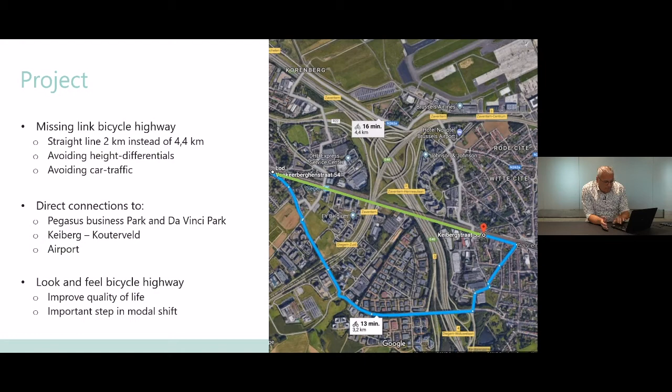What's the progress? The contractor Besix started last August, building the pylons, the piles on the R0 that will support the bridge over the R0. That's already built. The total project zone was the green line I mentioned, and the building period will run up to August next year. That's what we're trying to achieve.

What's happening right now: utility companies are doing their works in the Kleetlaan and the Mommaertslaan, and at the same time our main constructor is building the piles, as I mentioned, and the bridge and all the other stuff up to August next year. That's the plan for this project.

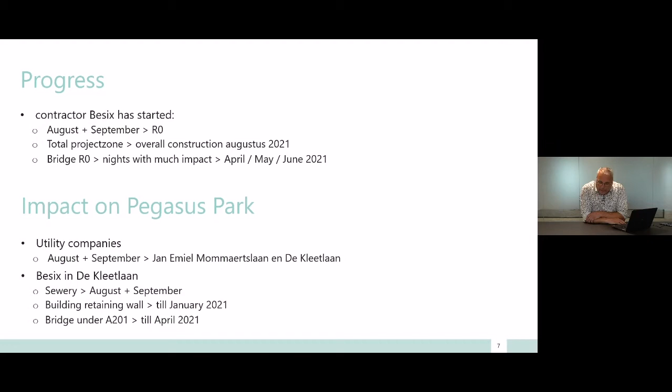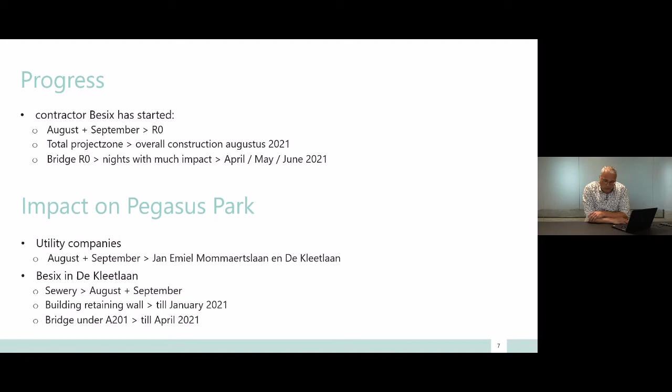In achieving this modal shift, it's all about making sure bikers can easily pass the R0 and the A201.

The next one is along the Woluwelaan, the R22, for the Ringtrambus. What's necessary to mention is that we want to focus not only on making the R0 better for vehicles and trucks, but also on improving public transport and bicycle paths.

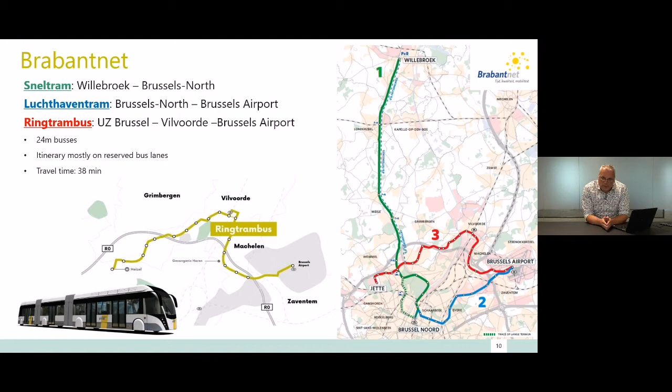So next month they start their project and it will take 2 years. The green part, that's our part from the Werkvennootschap. We did some checks on whether we need to wait until AWV finish their job, or we can do it at the same time, concerning the traffic that will be harder to find their way.

The thing is, we start our works next year. That's the point.

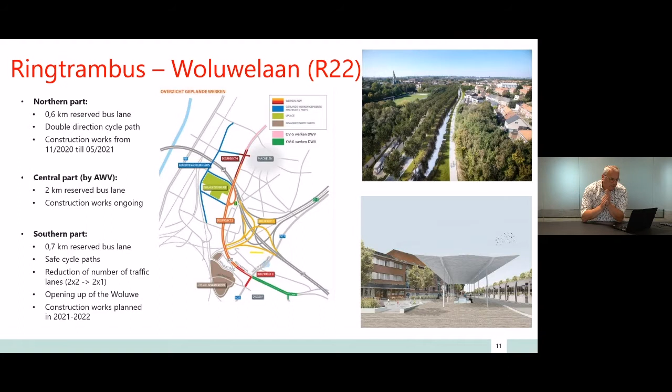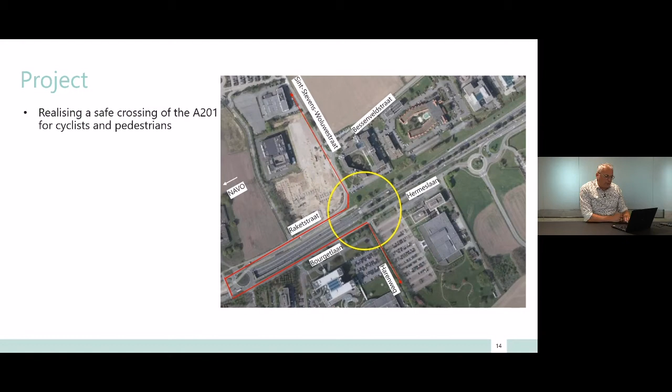The third project is about a bicycle highway, as you can see the red spot down here, next to the Toyota building and the NATO buildings, crossing the A201. What is the project about? It's also a missing link - we are building a bridge over the A201 to make sure bikers and pedestrians can cross it.

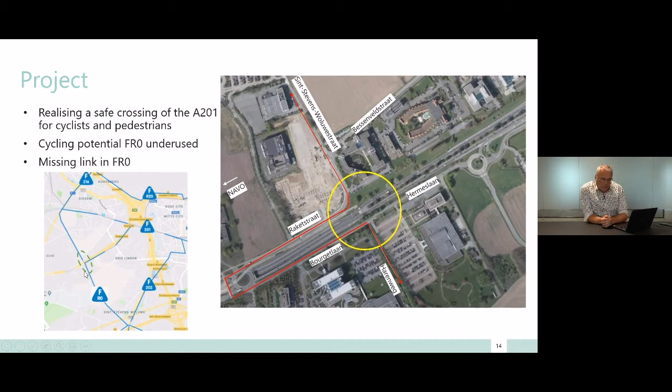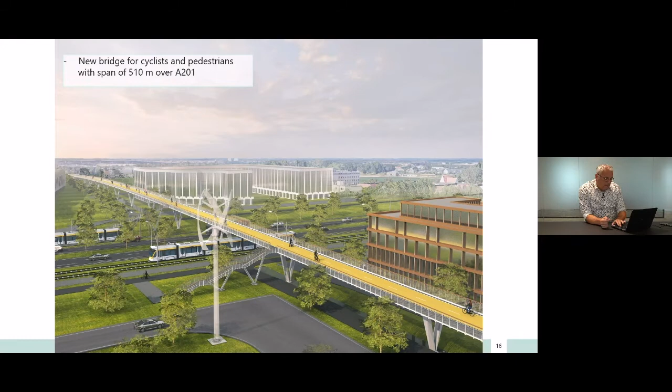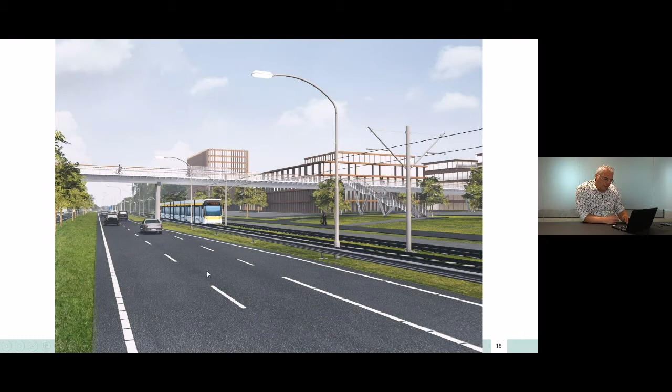Another view underneath the bridge. This is what you will see in about 1 to 1.5 years, when you are driving the A201 from Brussels up to the R0. What you can see already here is the image of the luchthaventram. Of course, we don't have that right now, but I'll mention it in a couple of slides, which is part of another project. The bridge is now built taking into account the building of the luchthaventram.

What's the progress? The building permit was submitted in July, and we expect to obtain it at the beginning of next year. The tender phase with possible contractors is already ongoing, trying to start the project in the first half of next year. This depends on what works the utility companies need to do concerning the building permits and so on. The building period is estimated at 1 year.

I have to mention that these timings depend on, as I said, utility companies and so on, but also on the way the constructor is building his construction. This will be part of the tender phase, and the different phases in which they will build these constructions are subject to approval. So it's not quite sure in what way, in what different phases, the constructor will build this bridge.

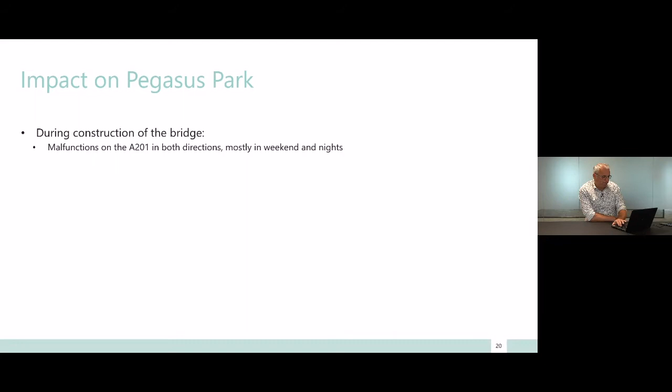Okay, so the next project will be the Henneaulaan. Not that near the Pegasus Park, but I guess a lot of people working in the Pegasus Park and driving eastwards of Flanders, of Belgium, looking to Leuven, will take this exit or access to the R0 to get to the Pegasus Park, or in the evening leave the Pegasus Park. So I think this project is also very important for you to know what we are doing there.

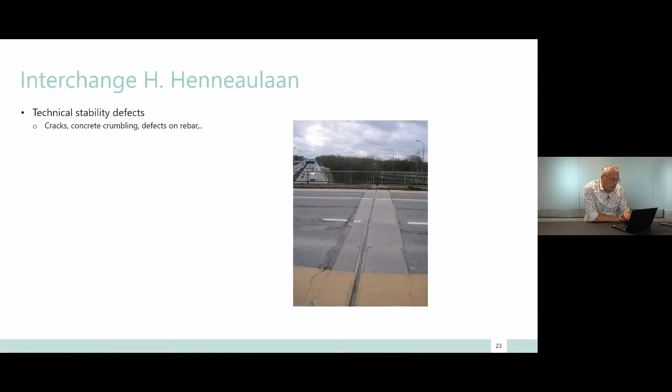So we look into the interchange of the Hector-Henneaulaan, which is in a bad condition at this very moment, with cracks and defects on the rebar and so on. We have, as you can see here, a couple of intersections which cause a traffic jam, as we know it right now.

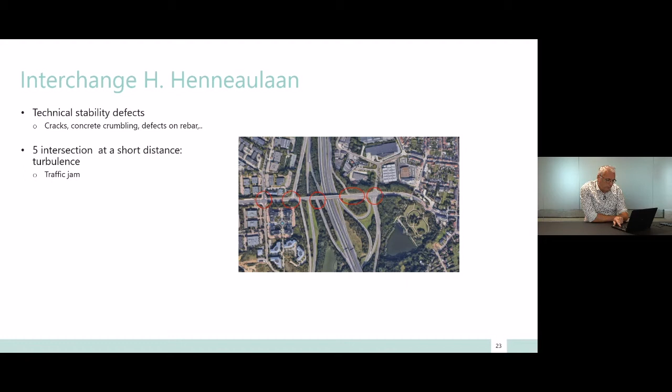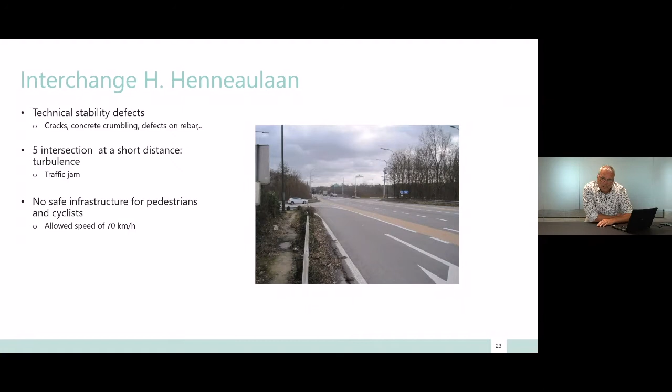I think I don't even have to mention the possibility for bikers and pedestrians to cross this bridge. It's life-threatening to do that. So we are trying to improve this.

And also for our public transport, it's quite important, as you see in the red mark. There are a lot of buses using the Hector-Henneaulaan to get to Pegasus Park or the other sites along Zaventem.

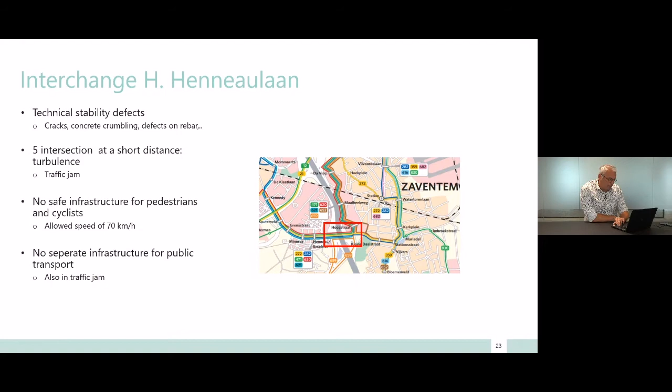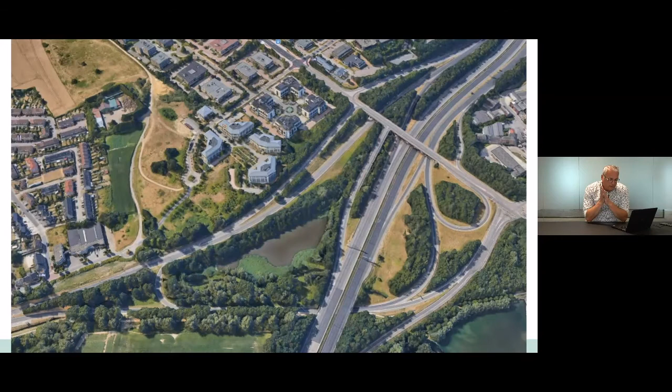Okay, so what you see here, that's what we have now. As you can see, there are different roads, exits to the Hector-Henneaulaan. Quite complex as we see it from above, and this is what we're trying to build starting from next year.

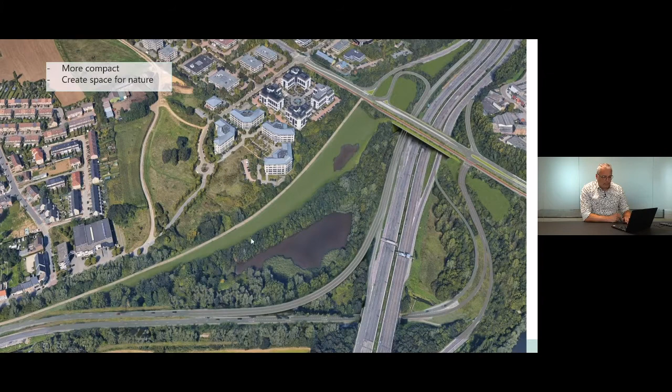As you can see in this image, on the western side of the R0 there is now a lot of space for nature and for water. Also on the other side, we're trying to keep every connection as it is right now.

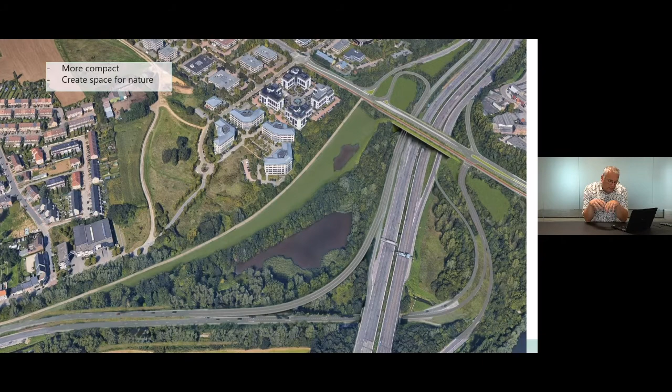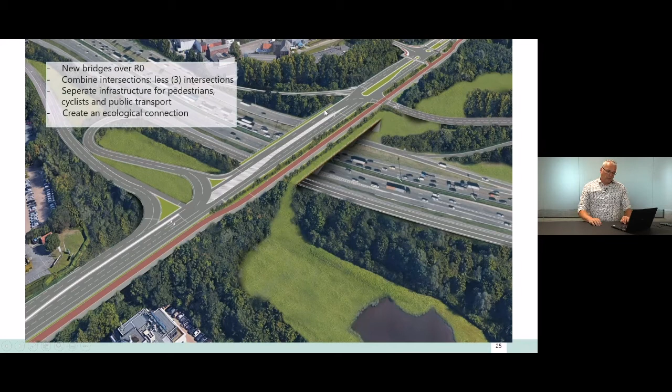In the other image, the red-brownish line crossing the image is for the bikers. Pedestrians as well have a free, separate lane, as you can see from the traffic. It's not very clear in this image, but in each direction, up to Zaventem and back, there will be a separate lane for public transport as well.

And the lanes we have for cars, vehicles and trucks, as we have now at this very moment, will be again part of this design. The difficulty in this project was that, as you know, in a couple of years we hope to work on the R0, and this bridge has to be built according to the different designs we have now for the R0.

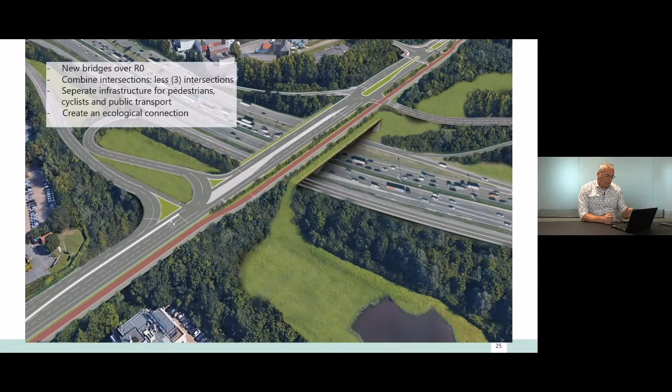What is also important to mention is what you see on the outside of the new constructions. This green element is a green connection, an eco connection from the inside of the R0 to the outside. Elements that we find very important in the whole project of the R0, to create, as we mentioned, ecological connections.

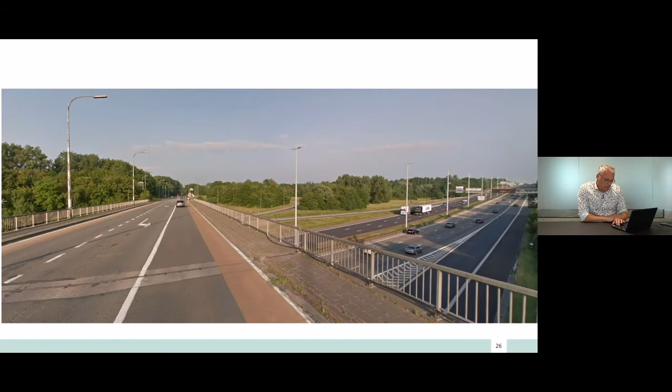Okay, another image of the present situation and what we are building or planning to build starting from next year. The bicycle path in between the green elements should be a bit easier, and according to the livability, should be improved.

Now, what's the situation at this very moment? The building permit was submitted in July, and we think we'll obtain it at the beginning of next year. Tendering is already in progress. We think we'll have a contractor next month, which means the moment we have our building permit, we can close the contract with the contractor and start maybe April or May next year. The duration of the project is 3 years.

Okay, what's the impact on the Pegasus? Well, there will be one longer period of 110 days max with no access to the inner side of the R0. There are some deviations and detours we found, and those will be in place during this period.

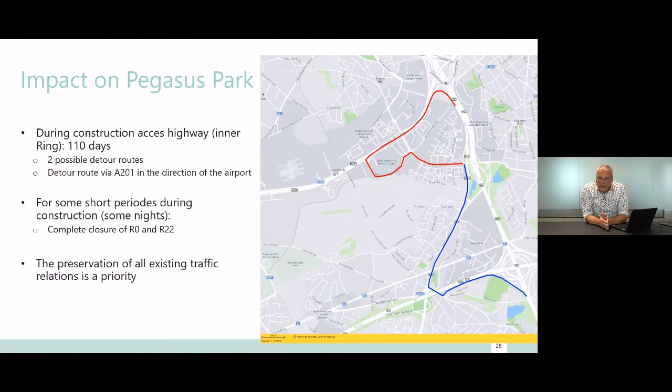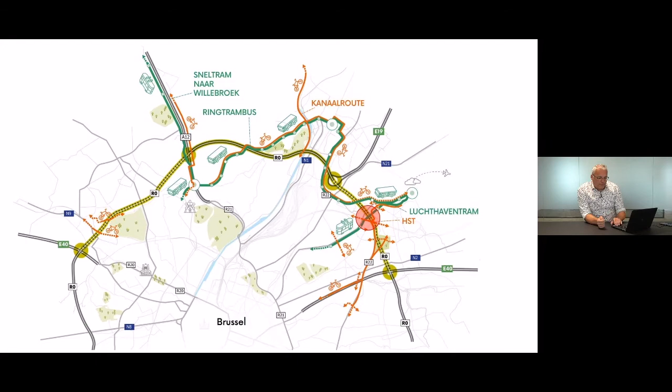The next project I will look into is the connection, not on your doorstep as the HST was, but this one is in your garden as we speak. It's a connection of the R0 with the A201. Now, what is it about?

It's not only, as we can see on this image, the creation of a new connection, as we mentioned, a single point interchange. The next slide will give you an overview and insight of how such an SPI looks like. It's not only the work on the interchange, it's also a complete overhaul of the A201 up to the airport, up to the R0, until Diegem and Diegem Lo at the northern part.

Trying to improve multimodal access to the airport with public transport. The ring trambus will pass through this area, and also the Luchthaven tram will pass up to the Da Vinci site. Guaranteeing traffic access to the airport is also a goal we have to achieve, and creating a bit more space for these ecological elements we need to take into account.

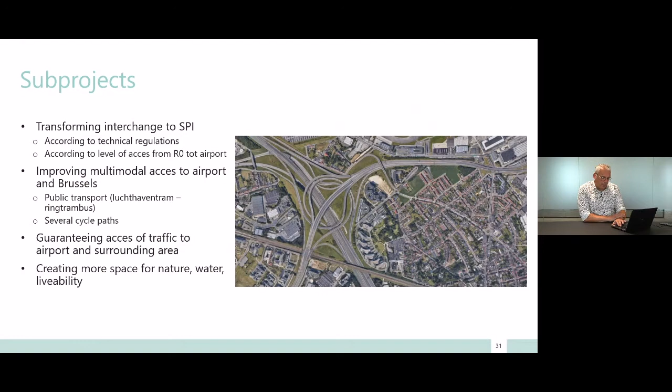Okay, this is the image of the situation we have now, and this gives you a simple insight of what we are planning to build. Trying to explain this image, which will be the first SPI, single point interchange, built in Belgium. You can find on YouTube examples of this interchange already built in America, for example.

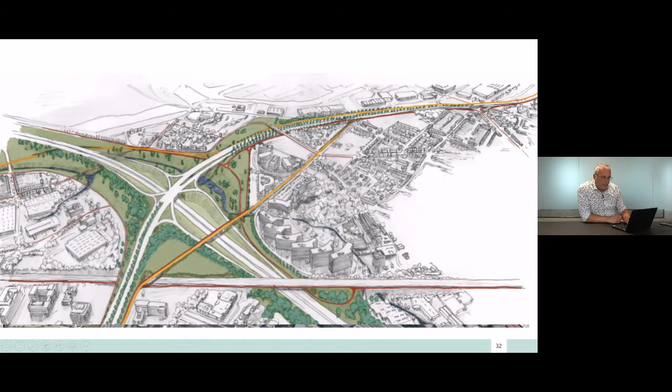That's what we have here: one traffic light right above the R0, which improves, in our opinion, all the important traffic flows, up to the airport, up to NATO and the northern part of Brussels, and access to the R0. What you also see here is this orange and red line, the connection of the Luchthaven tram, and the Woluwe, the river along this area, which is now underground. The connection with the ringtrambus, bicycle paths, and what is very important, right here in the upper corner, is the connection with the roundabout, Strabit, as we know it, which we have to improve as well.

It'll be a PPP project, a public-private partnership, which means a contractor has to build it in an estimated 4 years' time, and then do the maintenance for the next 30 years.

The tender phase is already in progress. It will take quite some time, as you can see, trying to end in the first quarter of 2022, trying to get a contract close and financial close, so the contractor can begin, let's say, in the third quarter of 2022.

The building permit is planned to be obtained next year. As I mentioned, we estimate these works will take some 4 years, but it'll be up to the contractor to find a way of building all this while making sure all connections remain in place during the whole building period.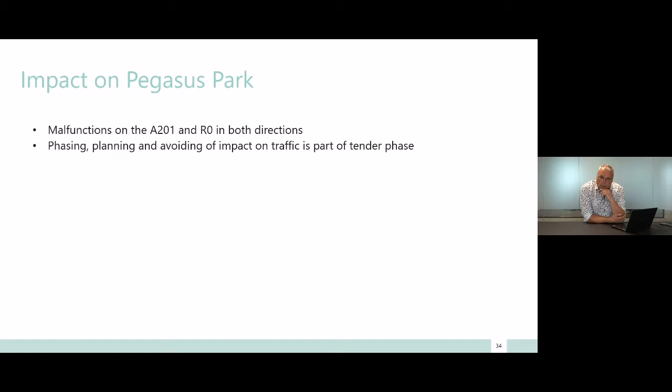Okay, that's the impact of the Pegasus. It's quite difficult to know at this very moment, because we are just in the beginning of the project, in the beginning of the tender phase, so it's quite difficult to estimate what the possible impact is.

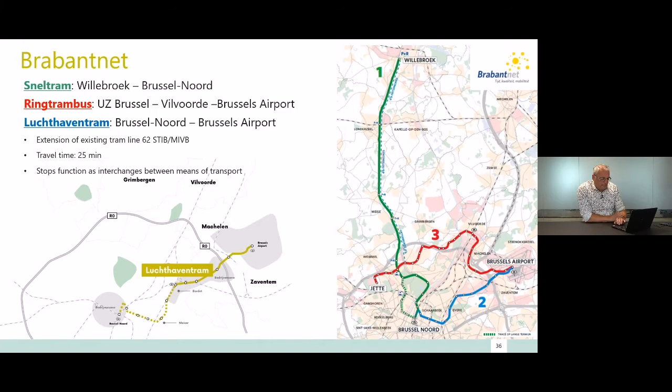The goal is to make it as minimum as possible, of course. Okay, next project will be Luchthaventram and Leopold III-laan, the A201, as I already mentioned. Again, concerning these three major projects on public transport, it's the blue one now, the Luchthaventram. As I already said, multimodal, trying to get the public transport up to the airport, the connection, airport business center, up to NATO and Brussels North.

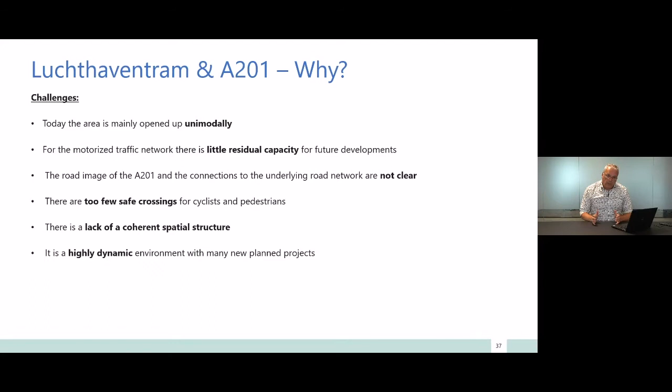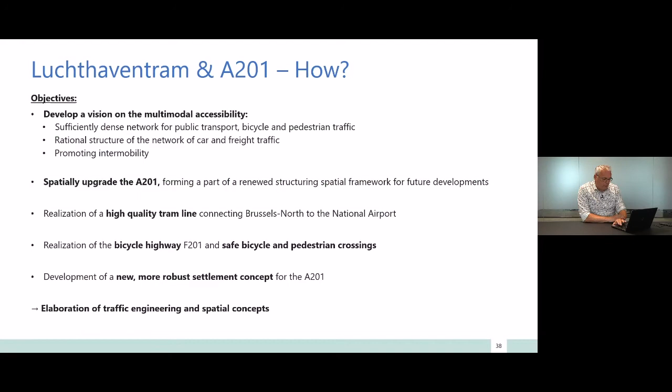Having some safe crossings for cyclists and pedestrians, and a complete makeover of the A201, which will be, as you see in the coming slide, completely different from what we have now. They just told me I have some 4 minutes left, so I have to fasten up a bit, I guess.

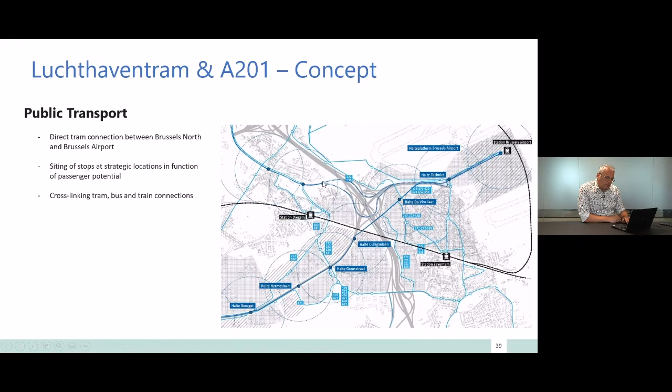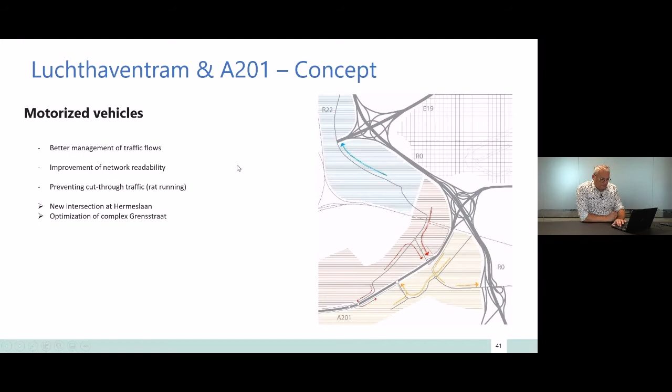This is an image of all public transport we have in this area of Pegasus Park. As you can see, the black line is railway, this one is the Luchthaventram, and so on, and the light blue are the buses. Bicycle path, and this is motorized vehicles. To conclude, all these things together have to be a multimodal access and interaction on the A201.

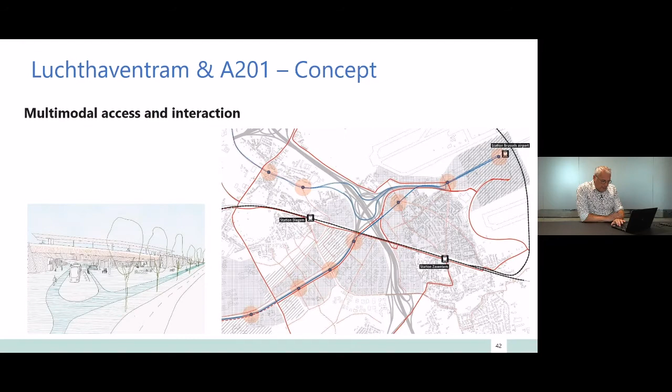The image on your left is an image on the Grensstraat and the connection to the A201. This may be a difficult image on your left. As you can see, maybe still, I think, 2 lanes in each direction. On the southern side, the separate lane for the Luchthaventram, and also separate parts for the bicycles and the bikers. What is important to mention is that the speed limit of the A201 will be reduced to 70 kilometers an hour, starting from the airport up to Brussels. In Brussels, as you know, it is already even 50 and 70 kilometers an hour.

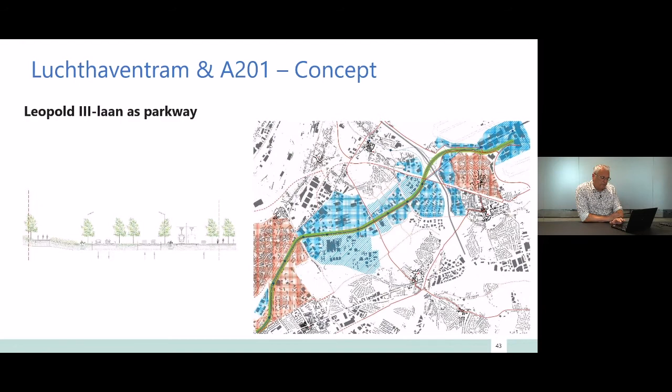This is also an image of all the projects we are planning to do in that area. And what's the timing about this one? Let's say, project-wise, projectnota, whatever it means, try to achieve it still this year. Again, building permit will be next year, tendering phase, planning to begin these works in 2023, taking quite some time, as I estimate, let's say about 2 or 3 years time to build the Luchthaventram and the makeover, as I said, of the A201.

Well, I think that was a very quick overview of the different projects we plan in the next couple of years. As I said in the beginning, I didn't mention anything about the R0, which is the major project, of course, but that process is ongoing in the next few years. Right, I think I can conclude my presentation and go back to Trace, I guess. And as she said, the Q&As will follow up. Thank you very much. Okay, thank you, Alain, for the presentation.

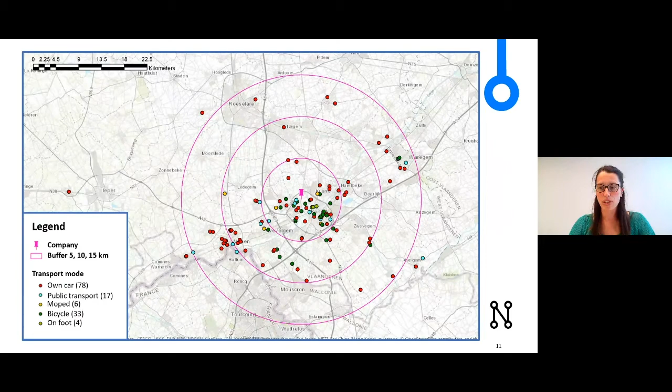If you would like to read more about this topic, you can always visit the website of New Mobility Network, where you can already find some articles regarding telework and how to adapt your mobility policy in COVID times.